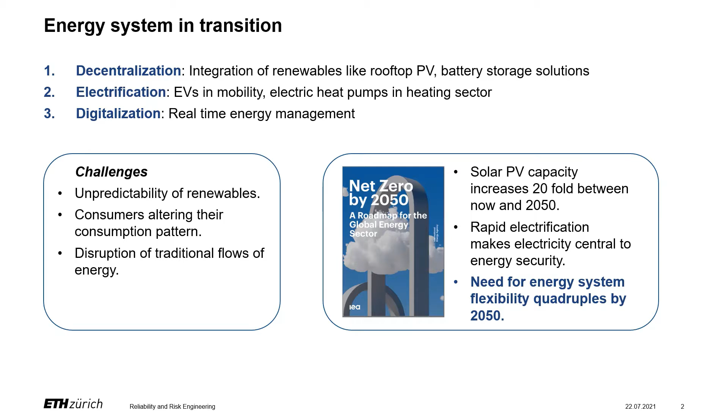IEA's Net Zero by 2050 roadmap for the global energy sector calls for large-scale investments in solar PV capacity and rapid electrification of different energy sectors. They also estimate the need for energy system flexibility is going to quadruple by 2050.

This is where a multi-energy system is considered a promising concept. A multi-energy system has multiple energy vectors which can interact with one another with the help of technologies, thereby offering flexibility in their operations. They typically operate in a microgrid environment where they're connected to the main electricity grid, so they can import and export electricity, or reserve capacity to be used by the main electricity grid for frequency control operations.

However, it is important to look from an economic perspective whether it makes sense for such a multi-energy system to offer these flexibility benefits to the surrounding electricity grid. This is what is addressed in this work.

A cost minimization model is developed which optimizes the multi-energy system operation, considering real market price signals for electricity and capacity exchange between the grid and the multi-energy system.

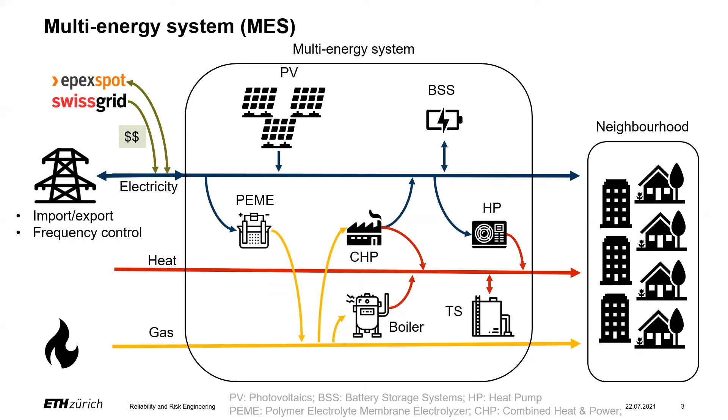The idea is to quantify how much flexibility a multi-energy system can provide to the surrounding electricity grid, considering these real market price signals, and also ensuring that it absorbs any uncertainty in load and generation that may arise within it.

Second, how do these flexibility provisions offered depend on the market framework and technology mix? That is, the idea is to identify input parameters which influence the amount of flexibility that is being offered.

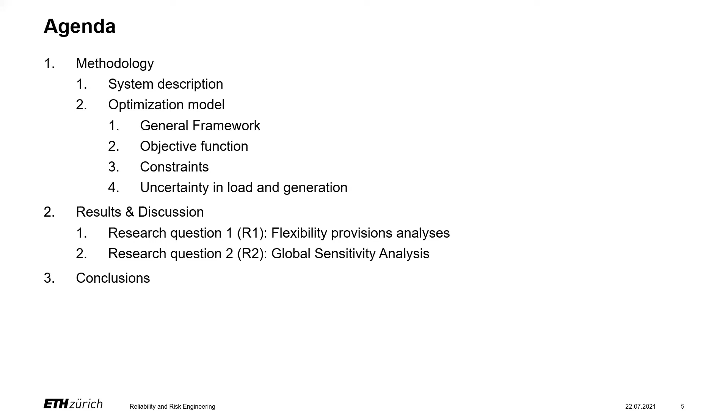The agenda of this presentation is pretty straightforward. I will start by describing the system considered in this work and the optimization model developed. Then I'll move on to the results, where I'll address the two research questions individually, and finally share my conclusions.

The multi-energy system considered in this work consists of 7 technologies. We have a PV renewable generator, 2 storage technologies - a battery storage system and a thermal storage system - and 4 dispatchable generators: a PEM electrolyzer, a combined heat and power plant, an electric heat pump, and a gas boiler.

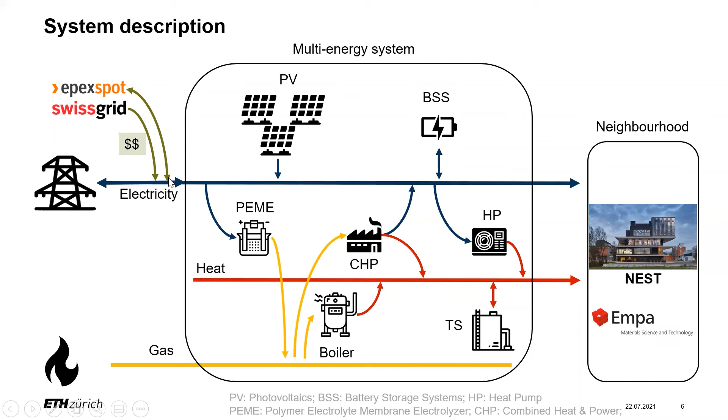The multi-energy system meets the electricity and heat demand of this neighborhood, whose demand profiles are of the NEST demonstrator of EMPA, which is a research center in Zurich. The system is in connection with the main electricity and gas grid, and the price signals for electricity are based on historical market price signals of the year 2019.

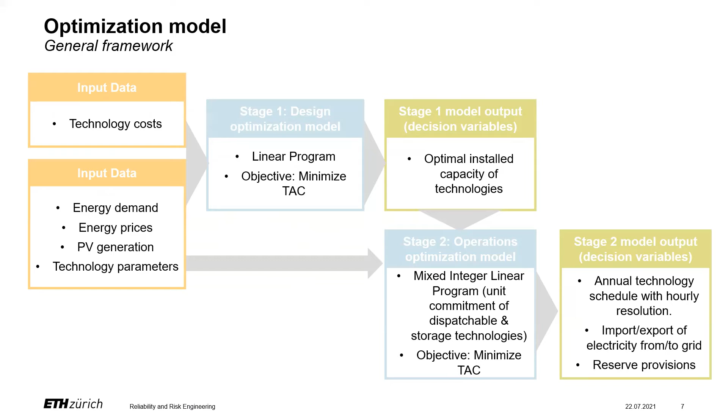A full year optimization is carried out considering hourly resolution. The problem is solved in 2 stages. In the first stage, a design optimization is carried out, which provides us with an optimal technology mix for the multi-energy system. This technology mix is fixed in the second stage, where the operations are optimized to obtain the final optimal schedule of different technologies, the import-export strategies, and the reserve provisions that are being offered.

The objective of the optimization model is to minimize the total annual costs of the system. The objective function is broken down into different costs and revenues. We have the cost of importing electricity and gas from the respective grids.

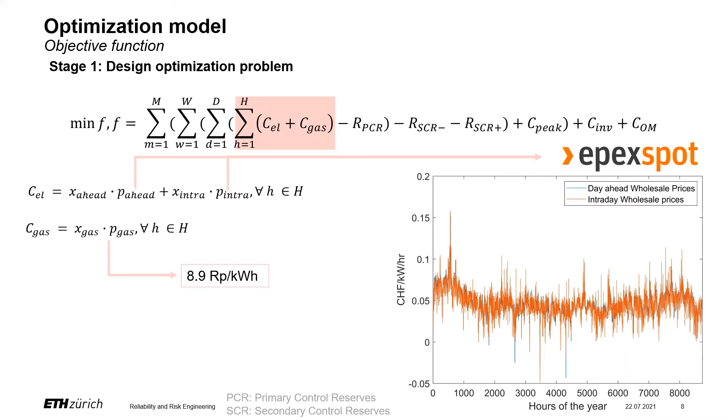The price signals for electricity imports are the historical prices for the year 2019 from the EPEX spot database. The price signals for gas are considered constant.

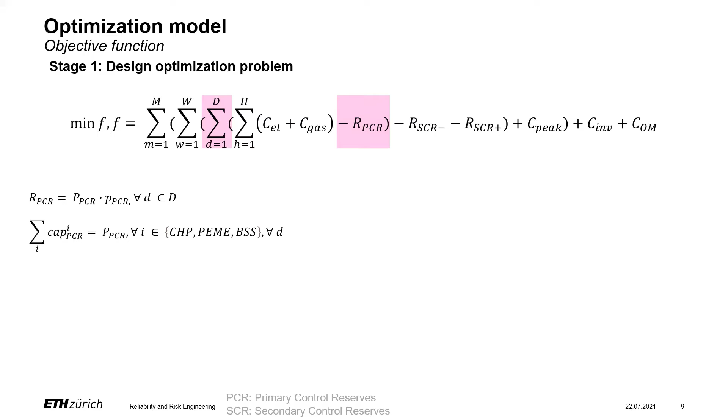R_PCR is the revenue generated by reserving capacities for PCR provisions. The capacities reserved for PCR need to be reserved for an entire day. CHP, PEM electrolyzer, and battery storage can offer capacities for PCR provisions.

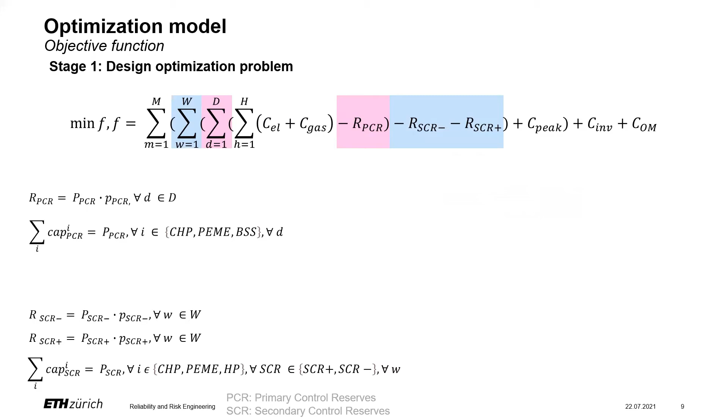Similarly, SCR minus and SCR plus are the secondary control reserves which are activated after the primary control to bring the frequency back to its nominal value. The capacities that are reserved for secondary control reserves need to be reserved for an entire week.

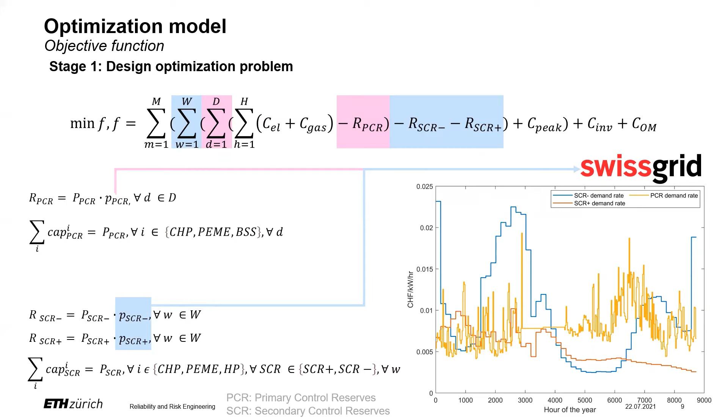The price signals for PCR and SCR are the winning bid prices sold by Swissgrid in the year 2019. C peak is the peak shaving cost, which is levied on the monthly peak capacity imported from the electricity grid. And finally, we have the equivalent annual investment and fixed operation costs of technologies.

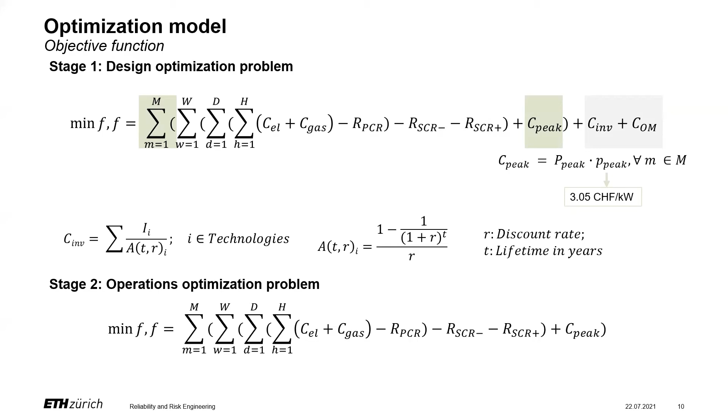In the operational optimization problem, we do not have the last two cost terms. The model is subjected to technology level and system level constraints.

At the technology level, since it's a mixed integer linear programming model, we have linear technology modeling. There are capacity limits, unit commitment, storage energy capacity limits, and ramping constraints for CHP and PEM electrolyzer.

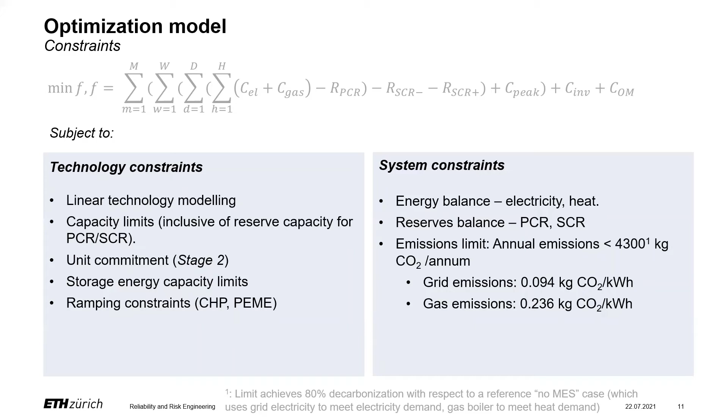At the system level, we ensure energy balance for electricity and heat, reserves balance for the different reserve services, and an emission limit is introduced so that the multi-energy system that is designed achieves 80% decarbonization with respect to a reference case of no multi-energy system.

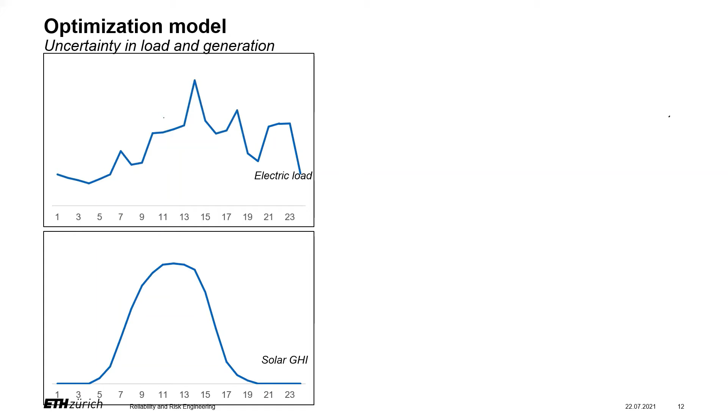The multi-energy system is also required to absorb any uncertainty in load and generation that may arise within it. For that, we have considered uncertainty in the day-ahead forecasting of electricity load and solar GHI. A robust method is adopted wherein we obtain the error values for the forecasts to develop an uncertainty envelope around the forecasted load and solar GHI.

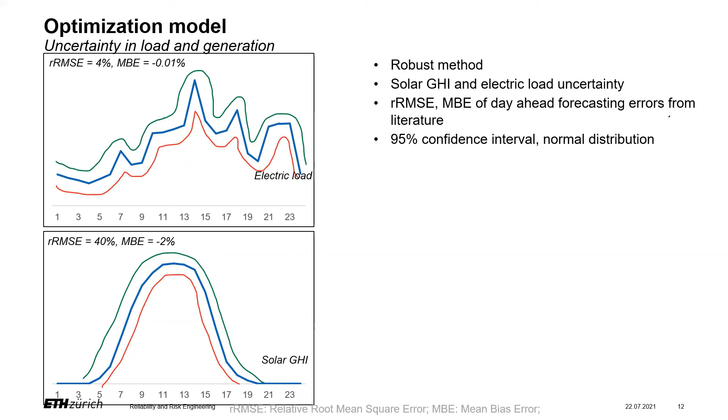These envelopes are used to obtain two worst cases or extreme cases of uncertainty. I call them uncertainty positive and uncertainty negative. Uncertainty positive is when the actual load is on the green curve and the actual solar output is on the red curve, so we need to increase production to keep supply and demand in balance. This is estimated for every hour of the year, and represents the capacity reserved within the MES that is not offered for flexibility to the surrounding grid.

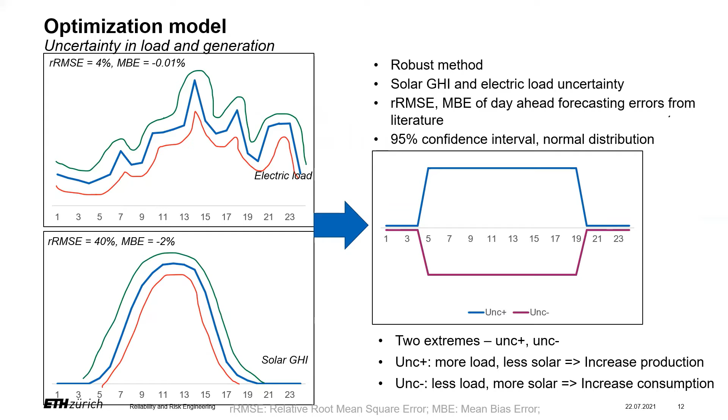I'll start with the results of the first research question on quantifying flexibility provisions. Starting from the design, we find that the optimal design consists of a PV battery combination to meet the electricity demand, and a heat pump thermal storage combination to meet our heating demand. We observe that there is no installation of gas-fired CHP and gas boilers, which means that the heating sector is also 100% electrified.

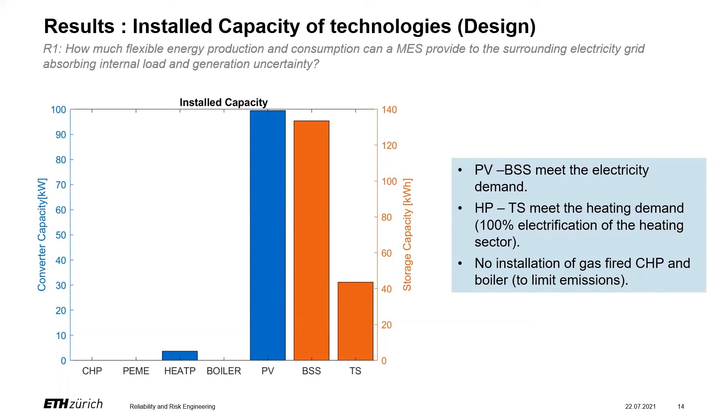Moving on to the costs, we find that the total annual cost of the system amounts to 28,617 Swiss francs. 67% of these total annual costs are due to investments in the four technologies that have been designed, 96% of which is invested in only PV and battery storage systems.

From an operational perspective, we find that the MES is able to gain some revenues by reserving capacities for PCR power and SCR negative power. These revenues are able to decrease our variable operation costs by 27%.

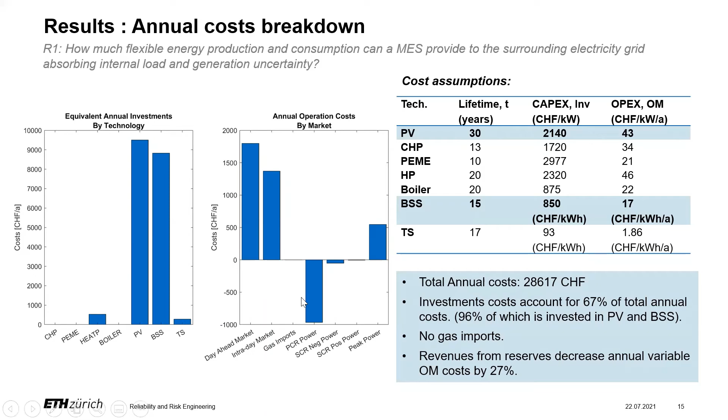To address our first research question, flexibility is quantified as the percentage of potential reserves that was actually offered by the MES, averaged over a quarter of the year.

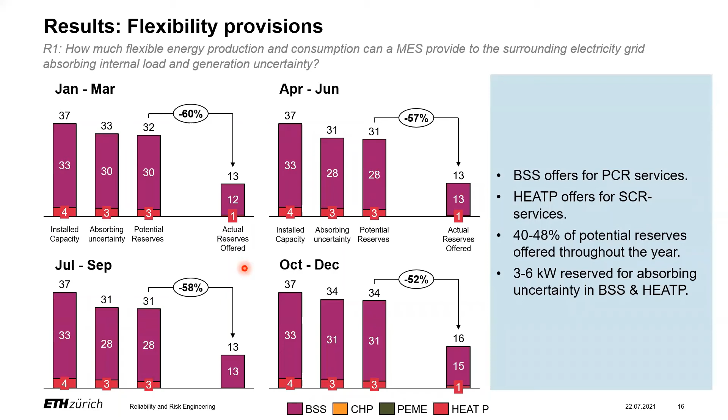We find that the battery storage system plays a major role as it offers PCR services, while the heat pump also contributes by offering SCR negative services. For the heat pump, it is observed that there is a seasonality involved when it comes to offering flexibility.

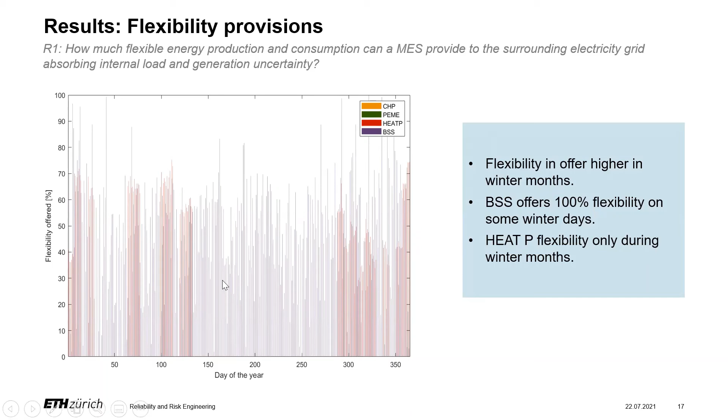To address the second research question and thereby identify input parameters that influence the amount of flexibility that the MES has to offer, a global sensitivity analysis using the Morris screening method is carried out. 20 input parameters were identified, including market and technology prices, and their expected distribution range was obtained through literature study.

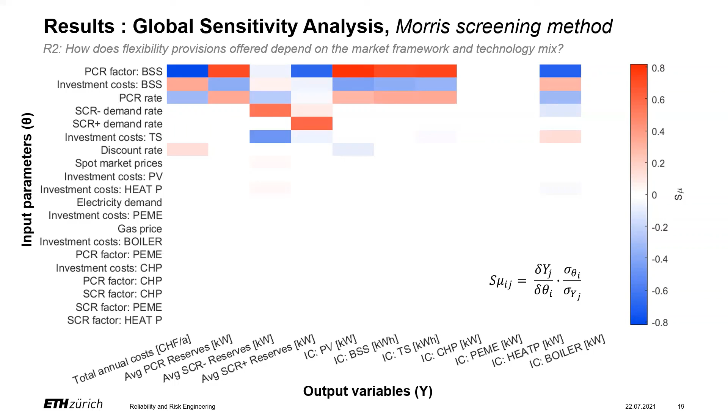This brings me to the end of my results section, and I would like to share the main conclusions and findings from our project. Firstly, we find that the MES is able to offer and provide flexibility benefits to the surrounding electricity grid, considering these real market price signals. It offered around 40 to 48% flexibility to the surrounding grid throughout the year.

We found BSS, or battery storage system, to play a key role in providing PCR services, while heat pumps provide SCR negative services. Though in our case, it was also observed that heat pump flexibility is seasonal, with no flexibility offered by the heat pump during the summer months.

From the cost perspective, the revenues from reserve provisions were able to decrease our variable operation costs by 27%, and the total annual costs are dominated by the investment costs in PV and battery systems.

From the global sensitivity analysis results, we can confirm that the reserves offered are robust to most of the input parameters. Only 6 input parameters had an influence on the amount of reserves being offered. These include the investment costs of storage technologies, battery storage and thermal storage, the battery storage PCR factor, and the remuneration rates for reserving capacities for the different services.

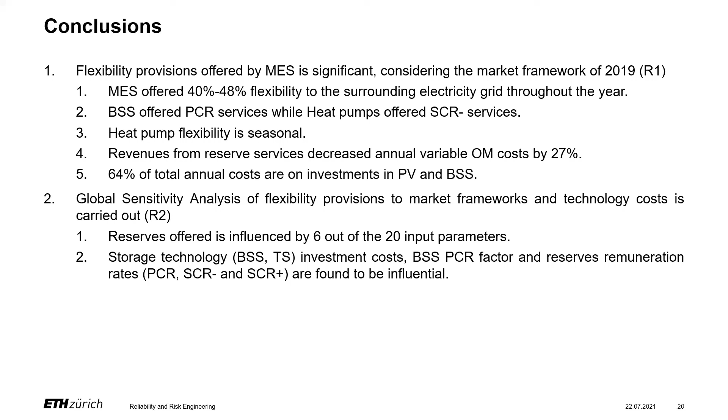This brings me to the end of my presentation. I would like to thank you all for listening.